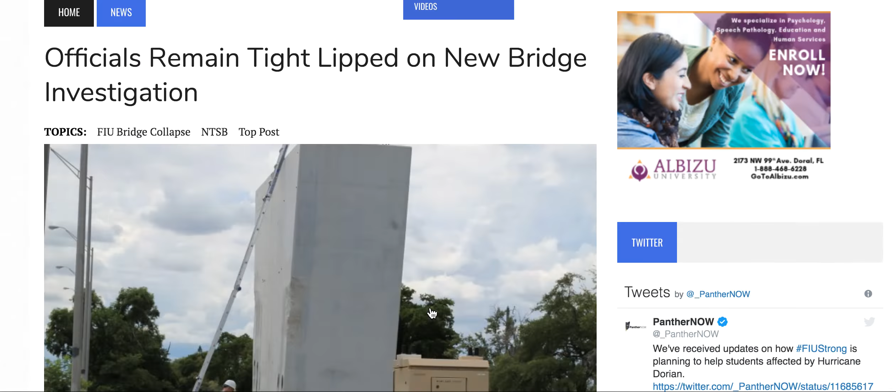That's it, Panther Now. I believe that's FIU's... one of their news, whatever it might be.

Let's move on. This was FIU bridge collapse, NTSB top post topics: officials remain tight-lipped on new bridge investigation.

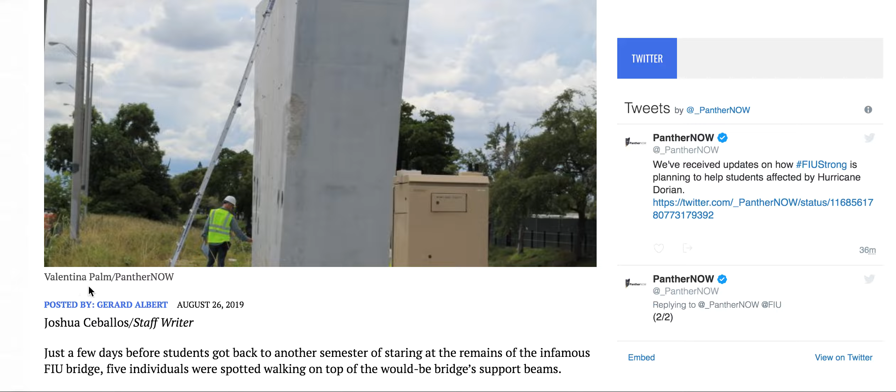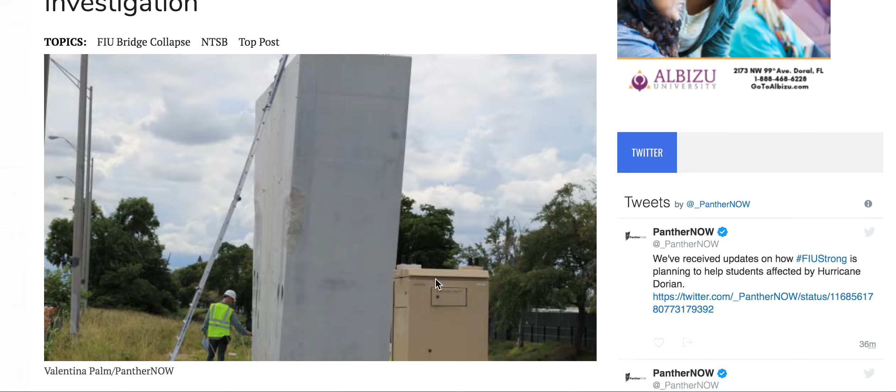Check this out. This person, Valentina Palm, Panther Now, has presented us with this photograph. Valentina sounds like a girl, and presented us with, well, I'm going to read it to you. Joshua, the staff writer, I guess that's the photographer then, Joshua, is the person that apparently wrote it, August 26, 2019.

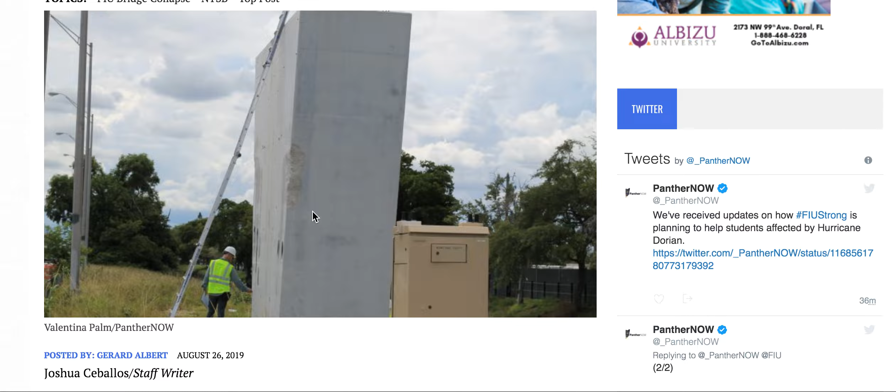Just a few days before students got back to another semester of staring at the remains of the infamous FIU bridge, 5 individuals were spotted walking on top of the would-be bridge support beam, right up here, and would-be bridge support beam. So it would give them some liberty on that.

That's the pier. Let's look at the photograph, the other one that they were able to get together. FIU's hats on there, and I'm going to cut to the chase a little bit so you know where I'm going with it. MCM and FIU are still partnering together, because it was an MCM person, as this person reports.

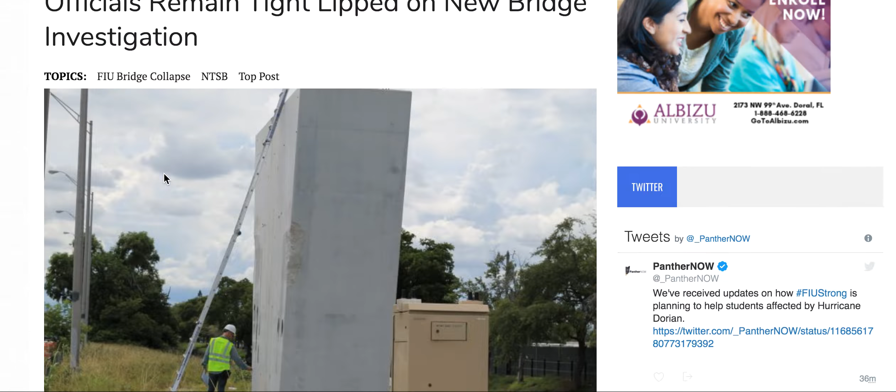On Thursday, August 22nd - let's do this one more time. August 26th, this was 4 days later, the article came out. On Thursday, August 22nd, 5 men were doing work on and around the concrete support of the failed bridge on the side opposite the university, which we know is the canal.

The men had equipment such as cameras on a tripod and a sheet of paper attached to the support column. So they didn't see what the sheet of paper said, apparently.

When asked who they were and what they were doing with the bridge, the group said that they had no comment. The group said that.

One older man with a white beard was wearing a reflective vest and FIU hard hat. This guy with the white chin.

While his companions remained tight-lipped, he said that they were doing an investigation. So the FIU cap-wearing guy, hard hat-wearing guy, said they were doing an investigation.

When asked if they were part of the National Transportation Safety Board investigation into the collapse, he said, 'Not that investigation, I can't tell you any more. Talk to General Counsel.' The General Counsel's office is the university's legal arm, and the General Counsel is the attorney for FIU. When the university is named in a lawsuit, the General Counsel's office gets involved.

Wendy Vargas, an attorney from the General Counsel's office, was the FIU worker referred to by name. Wendy Vargas referred Panther Now to media relations, who says the university cannot comment on what was going on at the bridge because it involves pending litigation.

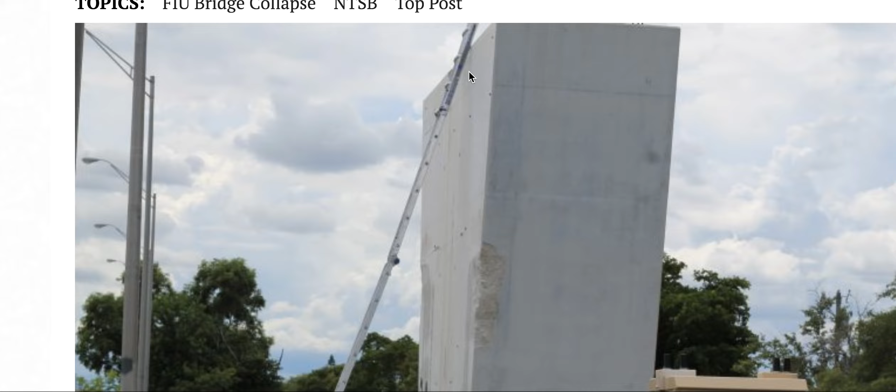Clothed up to the elbow. This one's clothed beyond the elbow — could be just folded up, could be the other person with another vest. Just trying to give it a count. Maybe five people, but they're up here, reportedly, on the tripod taking photographs.

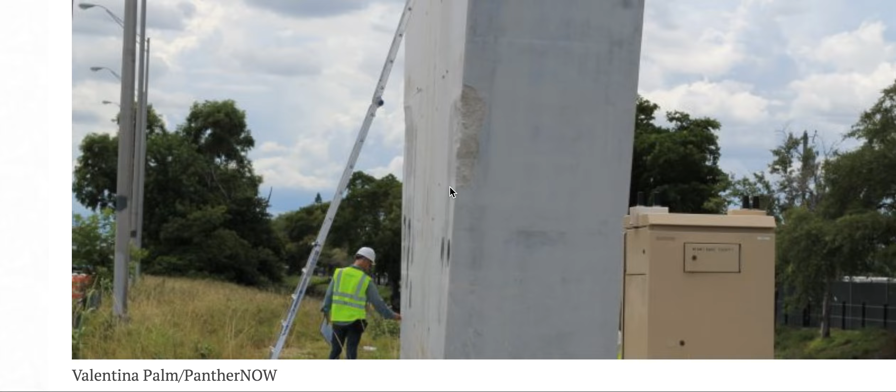And the white paper just might have been a permit, or just something they could look at to get scale. A lot of times they think there's a white paper — could be blueprint plans taped to the wall for scaling. So what could they have been doing?

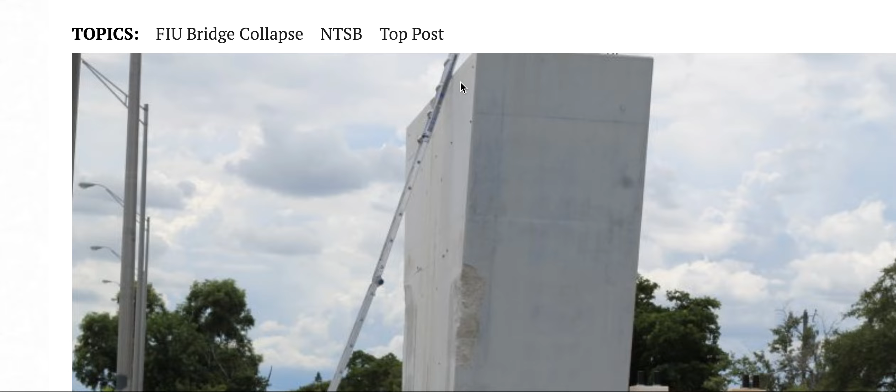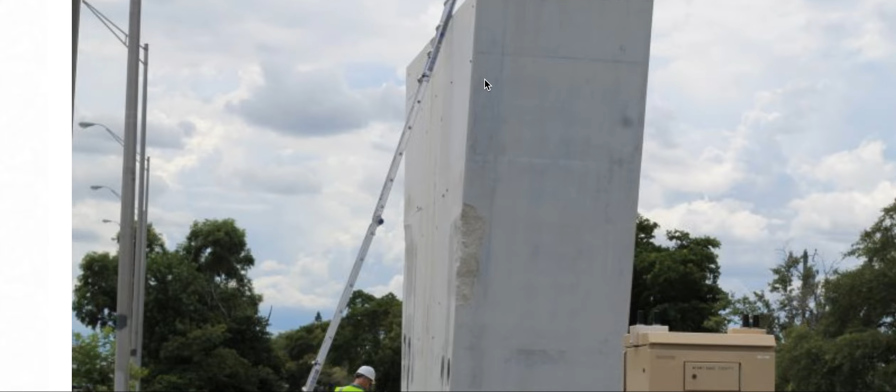Well, they could have been looking forensically, wanting to see if there's some bars bent where the drag marks were in the concrete. You can't be doing too much else, right? You can take measurements of everything, but you're not going to be measuring the sky.

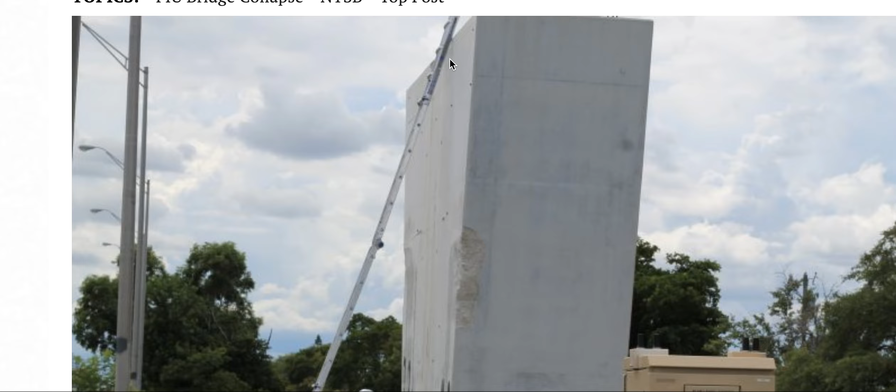So at this point they're probably looking for deflection in the bars to see if, and how, it came off this pier top cap. Could have been evaluating the chips up here — we talked about that in another video — and just the surface area, the drag marks.

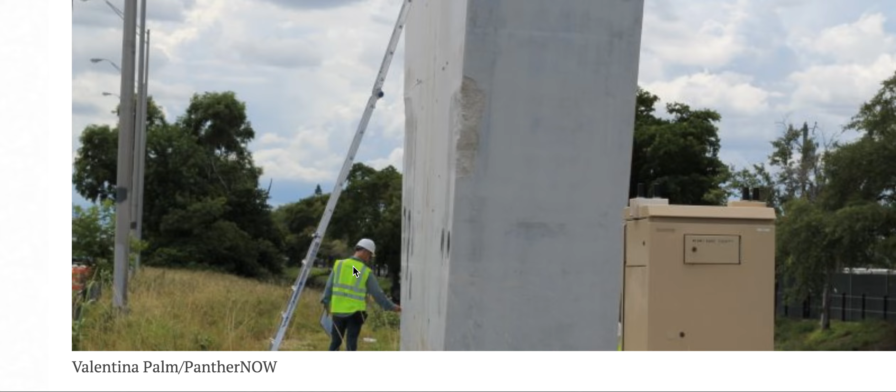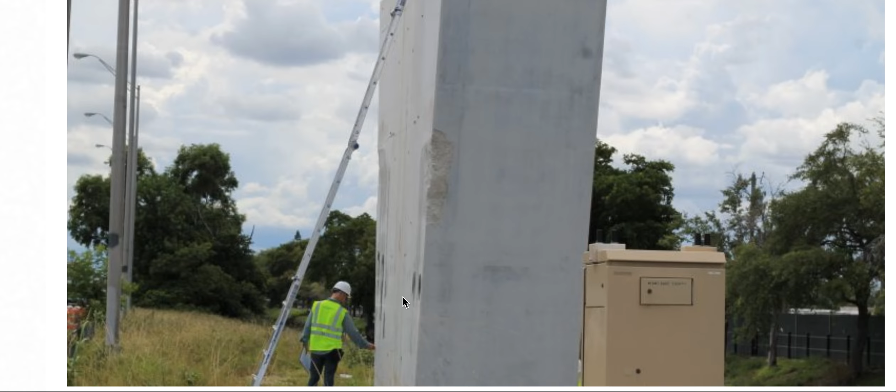If they're doing it without a surveyor there, it's easily questioned, your ability to triangulate this onto the surface. So you can see the parallel. I don't see a level, so I don't know how they're actually taking down true data without a level. Photographing and all that is just going to be vague.

All right, I'm ending the video. Just wanted to give that to you. If you want to find this, it's Panther Now: 'Officials remain tight-lipped on bridge investigation.'

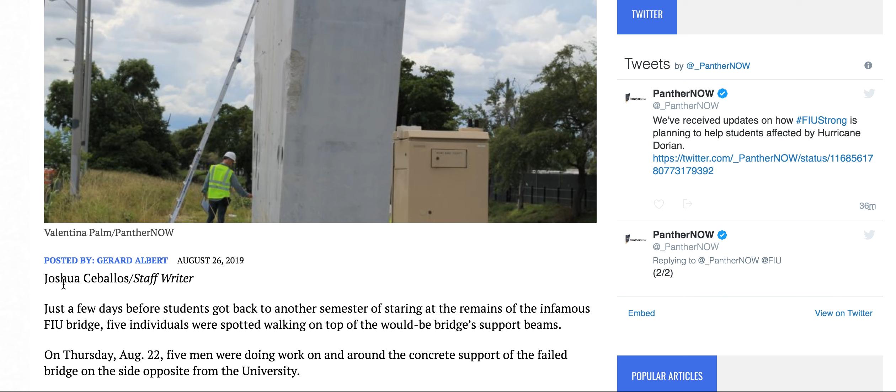And there's your Joshua and Valentina Palm — wish them the best. All right, I'm glad they did that. That's awesome. Take care.